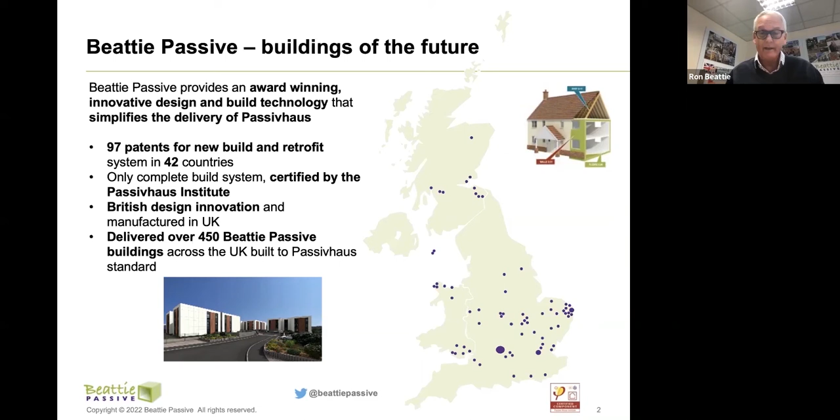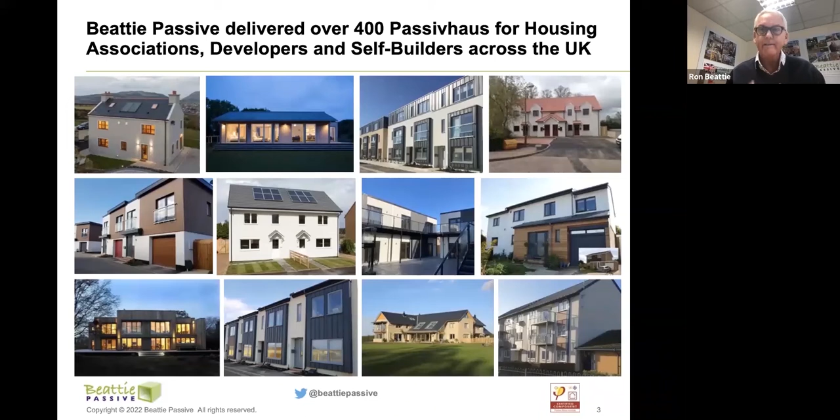So quite amazing, but a good test for the resilience of Beattie Passive products. So many different architecture types, but realistically, Beattie Passive can build any building. It's a really simple way of building homes and schools and many other buildings.

So for our products, we've got our on-site delivery process where we can build on site. We've got flying factories, and at the moment we've got flying factory partners across the UK that are actually building our system. We do the design, we do the testing, but they actually carry it out after a training course where they come on a residential training course, and then 3 to 4 weeks on-site training and inspection, learning how to build in the Beattie Passive system. And there, of course, we've gone into volumetric off-site manufacture, which I think is really going to be a real boost to the construction market.

It's not easy, like all things. We've got the planning, we've got hold-ups in the production chain and materials. So modular isn't the answer to everything on every site, but it's certainly a way of getting up production, delivering that same sort of quality of product and bringing more young people into the industry.

So I believe that modular factories are going to be a real part of Beattie Passive going forward. In fact, we're talking to 5 or 6 different partners at the moment about setting up regional factories where we can deliver our new build, our retrofit, and also potentially schools and things out of these regional factories, and not just one element - many, many different shapes and sizes of buildings.

We've got our Haus4 range, which is our meanwhile housing. And again, we're delivering large projects of 50 odd apartments, which are meanwhile - they'll be there for 5, 10, 15, 20, 30, 40, 50, 60, 100 years. But they can be taken down and moved. And that's an asset, where at the moment we're spending a fortune putting people in hotels.

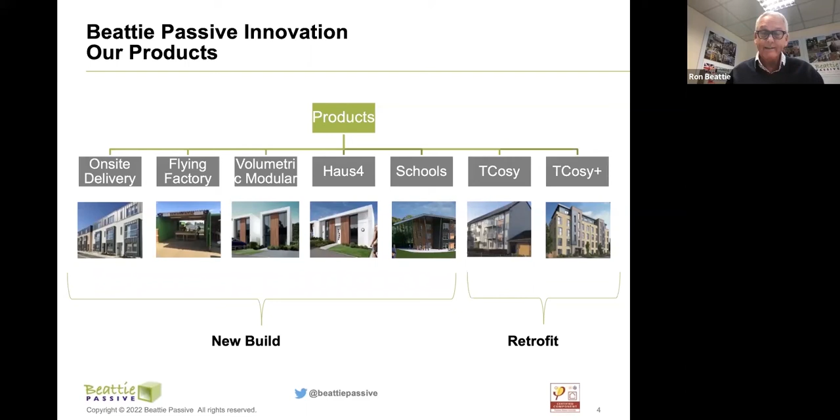One of our retrofit projects at the moment is we're teaming up to deliver around the Grenfell Tower estate, and we're doing testing with the council to look at all the products and how we test them all before they go onto that place. So we're going to have that sort of commitment in the industry to make things work and learn by our mistakes. Beattie Passive is about doing that, making sure that we test and deliver on the highest quality.

So let's get back to our schools. I'm sure you're pleased with what you come to listen to. So climate change, a big one, undoubtedly. We're all facing it, not only in the climate, but now on fuel costs. And that's going only one way, and like all things, it's never going to come down again to what it was.

So we're going to face many years of extreme pressure on fuel costs. And if you look at what our budget is for heating schools, that's going to treble, and that's going to make a real difference to what we can deliver. So we've got to do it in a regeneration factor, and we've got to make sure we pinpoint our money to get the maximum back from it.

Air quality in schools, I'm sure you know about, it's a major issue. It's a major issue in the way we're learning, a major issue in our children's health, and a major issue in a lot of things hidden in the old schools, like asbestos and radon gases, that 200 or 300 children a year die of, just because they've been in schools that have got those issues.

And of course, teachers as well. I think 300 teachers died last year due to different problems with their bronchial systems, but really cancers caused by asbestos or radon. So big issues that we don't like to talk about, but we've got to deal with.

And then we've got the increasing cost. As you know, building costs are sky high. Material costs are just going up 20, 30, 40%. So we've got to find a way of actually guaranteeing cost, and the only way we can do that is if we get guaranteed and we know what we're actually buying every time we buy it. Because every school that's normally designed goes through a design period, then a costing period, then a delivery period, and by the time it gets built, costs have gone through the roof. So we've got to find a way of meeting that.

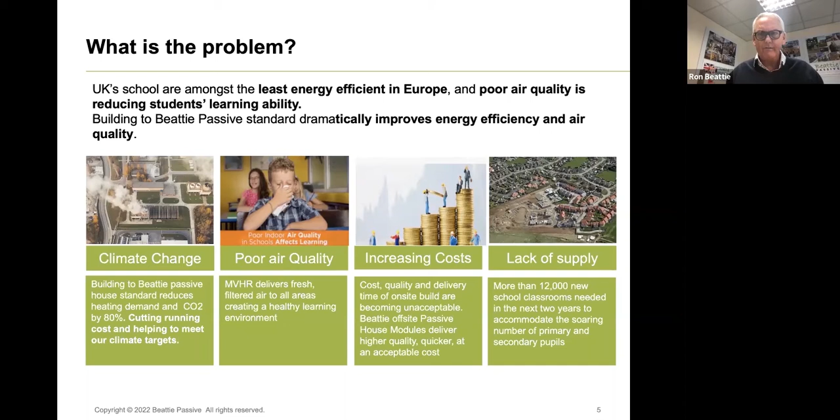So Beattie Passive, I said, I've built over 450 units. We're a certified Passivhaus system, and we can modularize, and that's what we'll be looking at doing.

How do we build schools that we modularize and build in components? A classroom is a component, a hallway is a component, a toilet block is a component, a staircase is a component, such as a medical room or all of those bits that need to fit together. If we can do that, we can start to alter, change, and move things, having something that's always living rather than one design with one system of M&E and one location. So we start to rethink the whole way that schools are built.

And then, of course, we can cut CO2 and heating as well. That's a big one, that we can actually reduce the energy requirement for a school and also cut that CO2, which is massive.

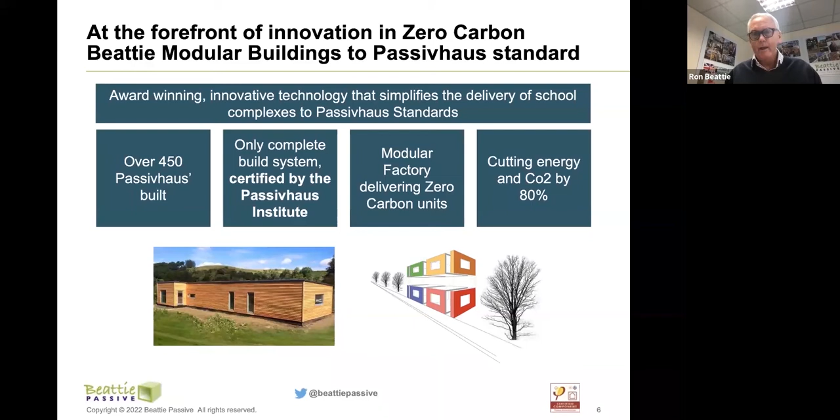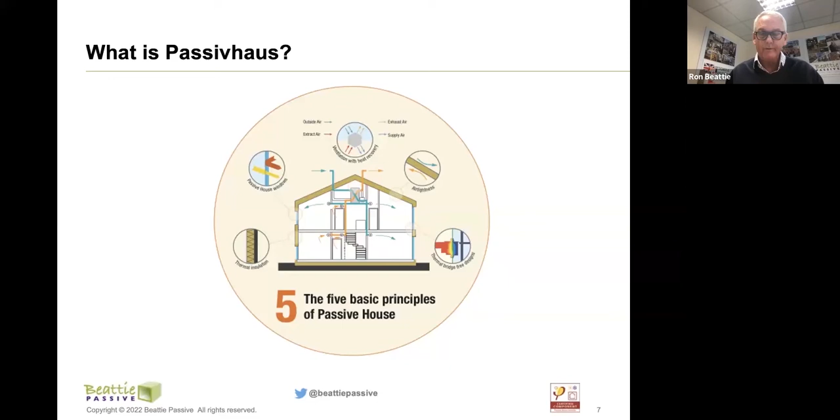So Passivhaus, as I say, Beattie Passive was the first. I think there's someone else now who's got a certified system in the UK, but for many years we've been the only one, and that's given us a real market lead on delivering Passivhaus. We've done 450 odd, all built by different people, all supplied in different shapes, but these are the fundamentals of it—an insulation that goes continually around the building.

Unlike any other building system, Beattie Passive creates a void under the floor, on the walls, through the roof, and that void is pumped with insulation, be it bead or rock wool or any type 1 fireproof material. It pumps around the whole thing, making the building not only very fireproof, but very well insulated with no joints. And that's the key—that continuous insulation.

We do that in our new build, but we also do that in our retrofit, where we go from foundation up over the building and inject that insulation. We're about, hopefully, to do over 250 across London soon. So for those of you who are really interested in retrofit, that'd be a great opportunity to come and see what's happening there. And again, for schools, it's an absolute must—we must start to think about that.

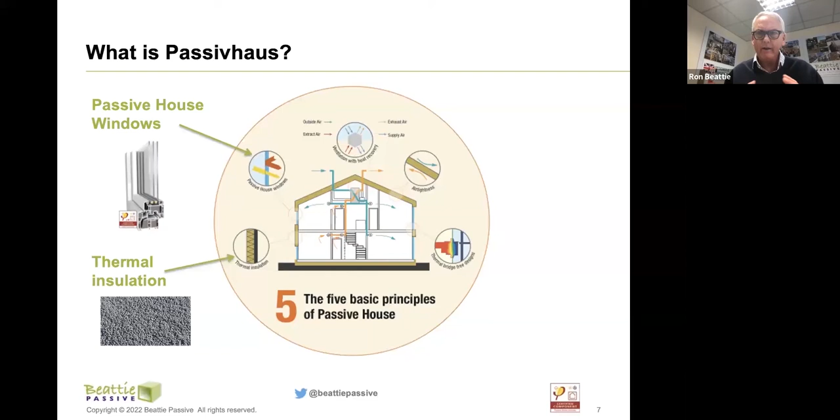So insulation that goes continually around the building. We then got triple glazed windows, so really high insulated windows that go into that frame.

And then we use heat recovery ventilation. Now, heat recovery ventilation is a way of ventilating that room to a really high standard, between 6 and 8 air changes an hour. That means all the air that comes into that building goes through a heat chamber, and the hot air we've created in that building—80% of that goes across to the incoming air. So we're only looking at topping up 20% of that energy cost, and we all give off 100 watts each, so with lots of kids in the classroom, we'll be really heating that up easily.

So heat recovery ventilation is probably one of the best ways to give high quality ventilation into a schoolroom, because it's filtered. We cut out things like pollen, and also the dust within that building is taken out, so they're a lot healthier environments. One of the things we can talk about in a moment is what that means to our children as they learn.

Air tightness—each Beattie Passive home reaches Passivhaus at 0.6, up against something like 13, 14, or 15. That means 15 times a day, or 15 times an hour, all the air within that building goes out, and it's got to be put back with hot air to heat that air so we feel warm. You can imagine how many times you're doing that. In a passive building, it's 0.6, and we're reusing 80% of it, so the need for that heating is drastically reduced.

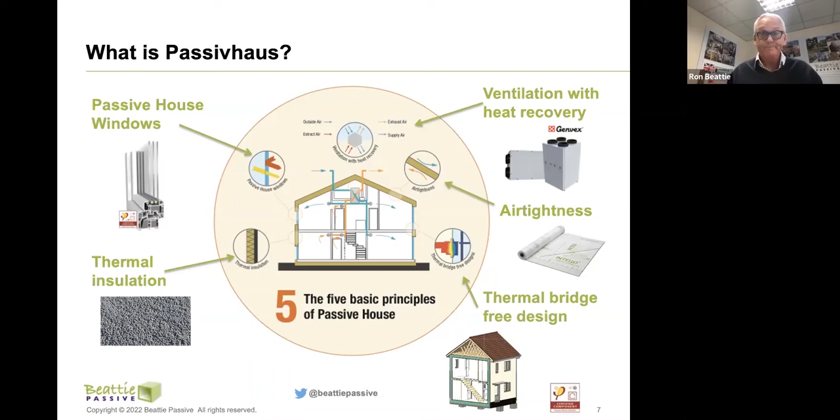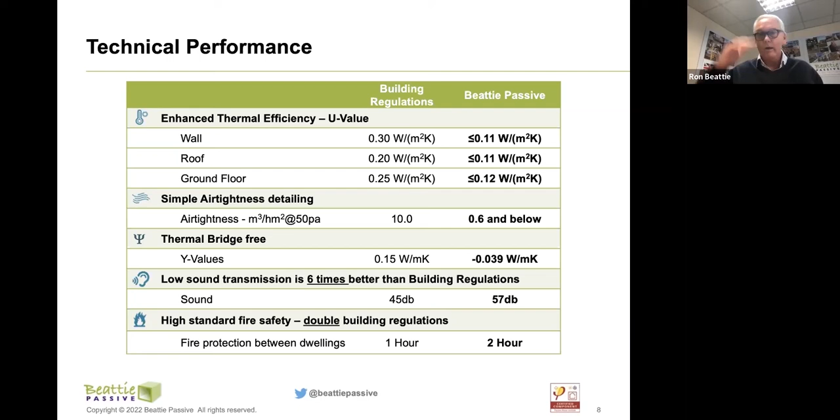And then about fire. One of the projects we'll be working on very soon will be Grenfell Tower, looking at retrofitting the existing stock at the bottom of the tower, which of course is going to be under a lot of scrutiny. We've always been very much looking at fire protection in buildings, and all our walls are 2 hour rated one side, so between classrooms that'd be 4 hours protection, whether it's above or beside each other.

As I said before, we've got to get more energy efficiency into our existing stock and our new stock. We know that. We've also got to get constant temperatures. Our children will learn, and it's well documented now, that around 20 degrees is the best static temperature for our bodies, and that means it's healthier for us to sit and learn.

We're not too hot, which means we're not in a classroom that's stuffed up where we're trying to get heat into it, so we're getting tired. We all know what it's like if we're in a meeting sitting there by the end of the day and we're all worn out. In a properly ventilated room, you're going to be alert for a lot longer. So we're looking at that 20 degrees, and the passive house is always around 21, so that's perfect for it.

We're also looking at sound, and if you look at most schools set around urban places where we've got cars and roads, some of those closed classrooms trying to teach have external sound coming up to 86 dB. It's incredible. So we've got to look at all our schools, whether new build or retrofit, and get that drastically down. Beattie Passive is some 6 times better than building regs.

So it makes a massive difference to the way teachers can teach their classroom, not battling either inside or outside noise, and also how the children can learn and hear. Because I remember being at the back of the class saying, 'I didn't hear that, miss,' when she asked me questions. That's because I was deaf. But nevertheless, those are the sort of things we need to build into this.

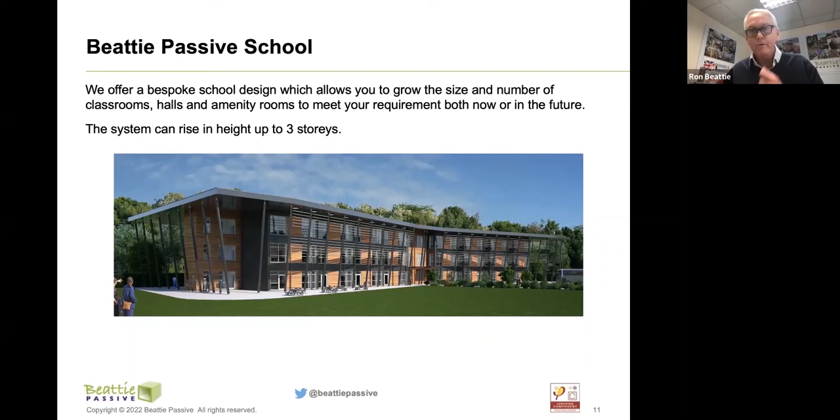So very simple: classroom, hallway, and a toilet block. If I asked how many classrooms you wanted in a school, you'd say 10 or 20, and we just build that with you. Sit down and build those things with your architects to see how it all fits together.

There's no reason it's not clad in brick, timber, or any other cladding. The roof could be pitched, monopitched, or flat roof - that doesn't matter. It's just building those building blocks together to give us the best way of delivering a school of the future that gives us CO2 reduction and a healthy environment for our youngsters to work in.

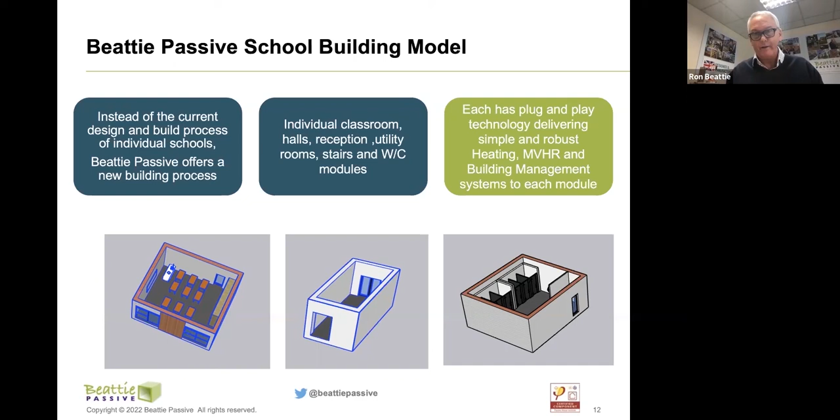So this school I'm going to show you was drawn up with one of our architectural partners, G&A Architects. This is very simply 6 classrooms, 5 admin sections, 6 halls, 2 lobby sections, and a sports hall. The sports hall is, of course, a big thing, so that's a steel frame.

And then we've got our modular off-site manufactured panels that go around and link into the existing school. Because we're pumping through that insulation, we can do some modular, some on-site if needed, and some as an off-frame scenario. So basically you've got that unit and it can all come down again if it needs to, and move on or be added to. Same process, same build system, whether it's stick built, panel built, or complete modular. That makes life so much easier when you've got tricky junctions to deal with.

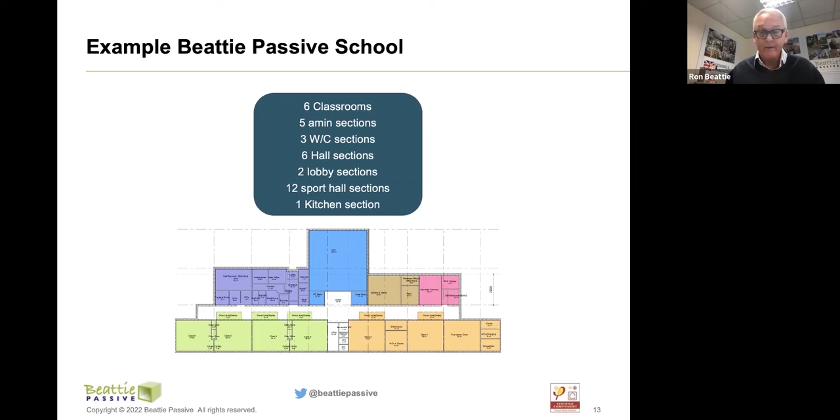So a very simple school layout, but one I'm sure is replicated throughout the UK. That's it in a simple SketchUp model. As you can see, each classroom is either single aspect or double aspect. You've got a hallway that runs through the middle, admin block in the middle of that, and it could just be picked up and re-altered and changed.

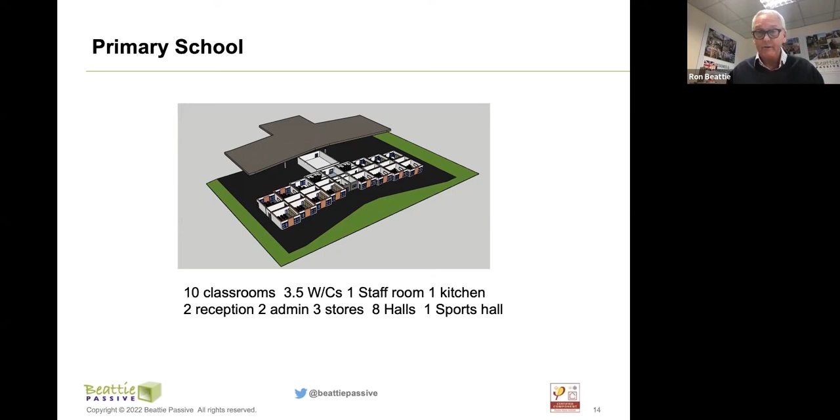So we're going to sit down with our clients and say, right, how does that best fit the site? We know the parameters we're dealing with, we know the size of classrooms, hallways, staircases and toilets - but we redesign it every time. So that's where we feel we've got to change.

This is something we're just finishing down in Cardiff at the moment, and these are actually meanwhile houses. This is from a few months ago, so it's moved on a bit more since then. Our block, the small block on the right, which is block A, is in fact a creche - it's a training area. These are for homeless people, and that development could be there for a day or 100 years.

There's 1, 2 and 3 bedroom apartments, and there's a whole administration and care facility going around that development for Cardiff Council, which is a wonderful idea. In fact, the government is currently spending £1.2 million a day on refugee accommodation in hotels - for 7.5 days of that money, you've got that development there.

So I think government needs to wake up and see that's an asset you've got forever. We haven't just wasted £1.2 million a day. You're actually delivering something that you've got forever. And the economics are just madness if we don't do more and more of this type of thing.

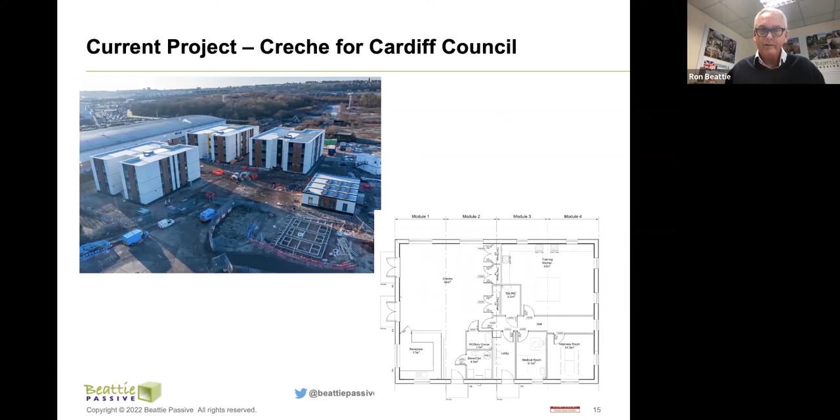As you can see on the floor plan, we've got a large creche there, a teaching environment, interview rooms and care rooms. This is the sort of thing we're delivering to Passivhaus, zero carbon standard at the moment. If some of you want to come visit this facility, Ken will pick that up with you after this presentation. We're doing it, we're delivering it, and it's working. It's a very exciting opportunity to show you what's happening at Beattie Passive.

So why Beattie Passive? I think it's really around quality, around having something that's going to be the future of building. It's about a new way of delivering, a whole new way of supply, and about young people in the industry. We need to fill our factories with new young blood to build the house of the future.

We lose 400,000 people a year out of construction, and we don't put anyone back. We've got to re-educate and get people back into schools who understand where they're living and what they're doing, and help build those skills of the future and retrofit the existing stock. So an immensely interesting and exciting process for Beattie Passive. I'm very pleased that we've started to look at schools as a big part of what we're doing. Very exciting.

Great, well I hope that was a useful infill into where we are at the moment with our school building programme. If there are any questions, please bring them over now and I'll be happy to answer them. Okay, thank you, Ron, for that. We've had a couple of questions through already, so I'll start with those, and please drop any more questions in the Q&A box.

What is the maximum unsupported span you can achieve with modular school classrooms? At the moment our span in classrooms is 12 metres in timber. It can be a bit longer in steel, but we won't transport it, so we're limited by what we can transport. In the school halls, we're looking at a portal frame, because we've got larger, taller buildings that we won't be able to transport, so there we've got just a steel portal frame, and then we put the structure over the top of that.